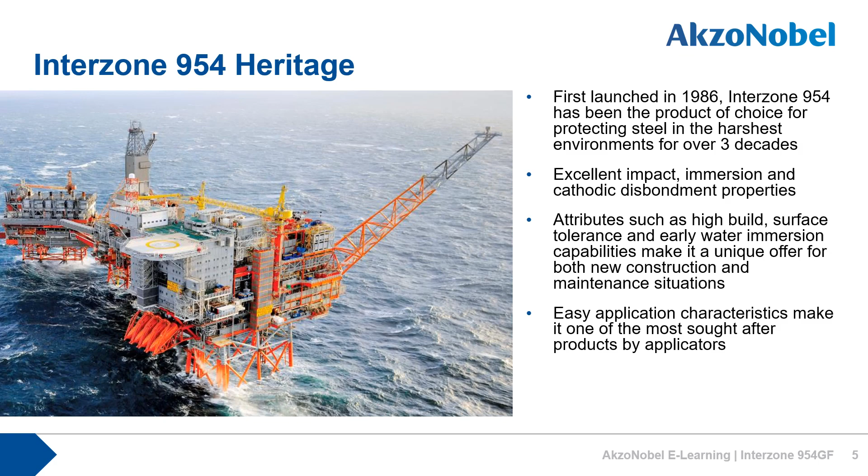Given that it is so well liked by both applicators as well as owners, it is little surprise that it's been one of the most widely used products across all our market segments. And to date, we have over 85 million square meters of steel which have been protected using Interzone 954, which is by far the most of any heavy duty product in the protective coatings world.

A key challenge for us in upgrading our heavy duty product offer was then to introduce a glass flake epoxy which retained all these characteristics of Interzone 954 that customers love, with an additional enhancement of the right loading of glass flake pigmentation to provide improved performance. And that's what we've tried to do with Interzone 954GF. So as you may have guessed by the name, it retains the basic formulation backbone of Interzone 954 and all of the great application properties and excellent corrosion performance of the original product.

A question that some of you might be asking yourselves now is, if the original product performed so well, then why do we need a glass flake version at all? And that's what I'll try to answer in this section. So to answer that question, I'll take a couple of minutes to talk about how glass flake pigmentation works. Glass is an inert material, by which I mean it does not react or dissolve with any of the harmful chemicals that we commonly come across in our industry.

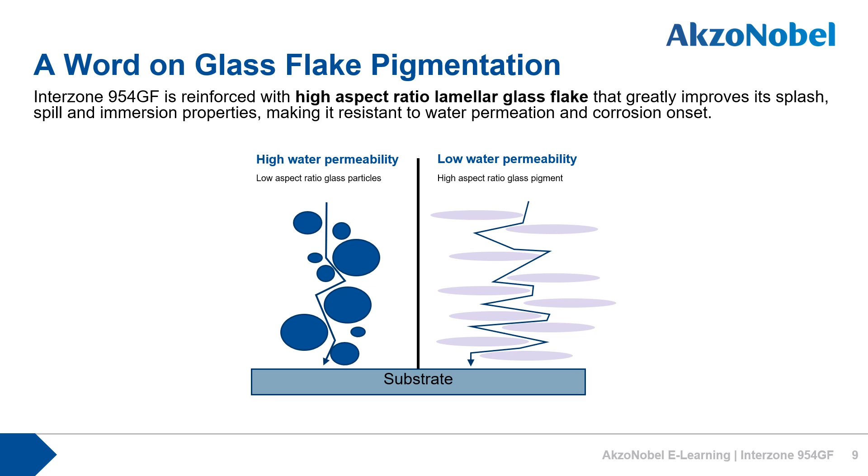We see several products on the market that claim to be glass flake epoxies, which have less than 3% glass flake pigmentation. At those low levels, they really don't make any difference to the performance of the product. On the other hand, if you go too high, then you lose out on the application properties of the product, as there isn't enough resin to be able to flow out and wet the substrate well.

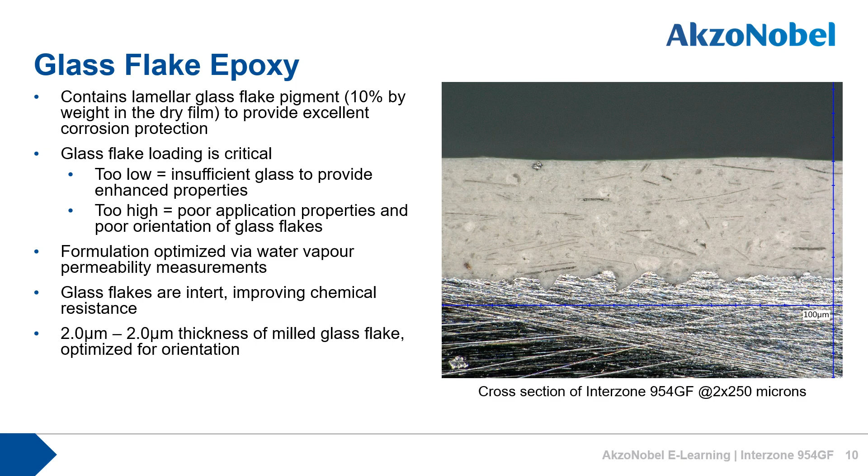A final point I'd like to highlight on this slide is that the thickness of the glass flakes is about 2 to 2.5 microns, which we found gives us the optimal results in terms of parallel orientation of the flakes. As a result, we've got Interzone 954GF, which provides all the great application properties that our customers love about Interzone 954 with the enhanced corrosion protection that the glass flake brings with it.

In this section, we will take a closer look at the features and benefits of the product. This slide gives you a snapshot of the features and benefits of the product. First, which we've already discussed, it's based on the Interzone 954 technology platform, and that brings with it decades of proven performance and application properties.

We've just discussed the lamellar glass flake pigmentation, and that gives us confidence in the long-term corrosion performance of the product, which has been borne out by the fact that it performs extremely well in accelerated corrosion tests. We haven't discussed yet that the direct to metal application properties of Interzone 954GF are excellent. So we get well over 10 MPa in adhesion values direct to steel.

It is tolerant of poorly prepared substrates such as power tool cleaning, hydrojetting, etc. It can also adhere well to existing aged coatings, which makes it a very good maintenance product as well. And that is a benefit because it reduces the need for primers, which increases productivity both in new construction as well as in maintenance, which at the end of the day reduces cost to our customers.

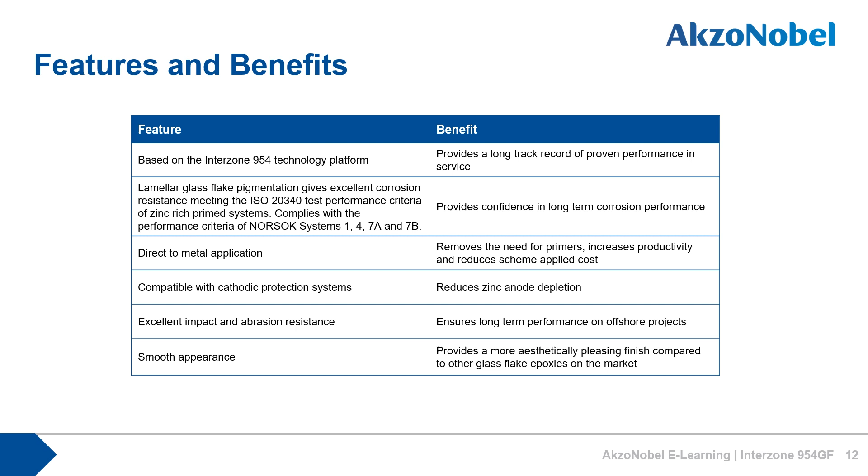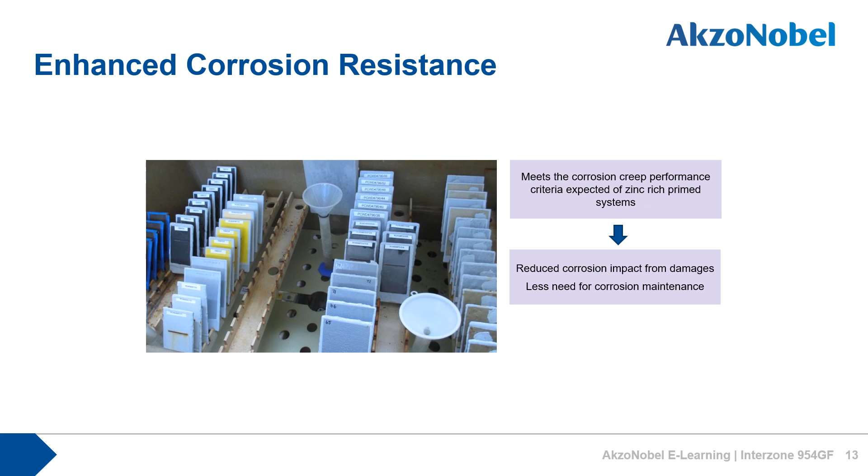We've discussed previously the enhanced corrosion resistance that glass flake pigmentation provides. This has been borne out by the fact that Interzone 954GF has shown exceptional results in accelerated tests. In fact, in the pre-qualification tests for NORSOK, it performs to a level that meets the criteria expected of zinc-rich primed systems, which gives us the confidence that it can provide very long-term durability in the harshest of environments.

On this slide, we can see how some of the application properties of the product save our customers time and money. We've already talked about the excellent application characteristics of the product, but here I will concentrate on three aspects of that. First, the product has excellent direct to metal application properties, both in new construction and maintenance, which is unusual for a glass flake epoxy.

Second, it has fast cure and low temperature cure down to -5 degrees C or 23 Fahrenheit, which can be very useful in cold weather conditions. And third, it has a wide overcoating window, both minimum overcoating as well as maximum overcoating, as well as good compatibility with a range of top coats.

The chart on the left of the screen, which has a blue background, shows the applied cost per square meter of an Interzone 954GF system compared with what we term as a traditional glass flake system, which is one that doesn't have great application properties that we discussed and usually needs to be primed with a typical primer like a zinc-rich primer or in some cases an epoxy primer. As you can see, the elimination of a need for a primer reduces material cost by about 20% when using the Interzone 954GF system without any detriment to performance.

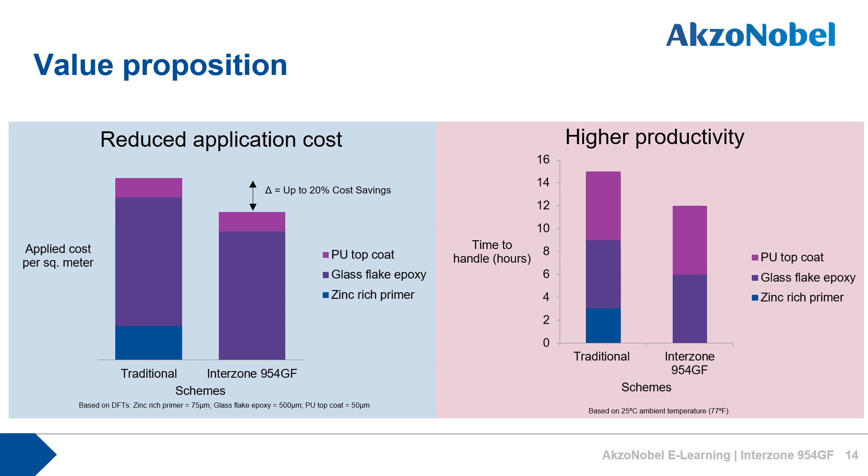As previously discussed, we believe that the selection of a 10% glass flake pigmentation level has resulted in a product that is just as easy to apply as the original Interzone 954. Spray tests in our labs as well as in customer shops have confirmed that this is the case, and Interzone 954GF is easy to spray out, quite uniform, and gives us a smooth and glossy appearance after cure.

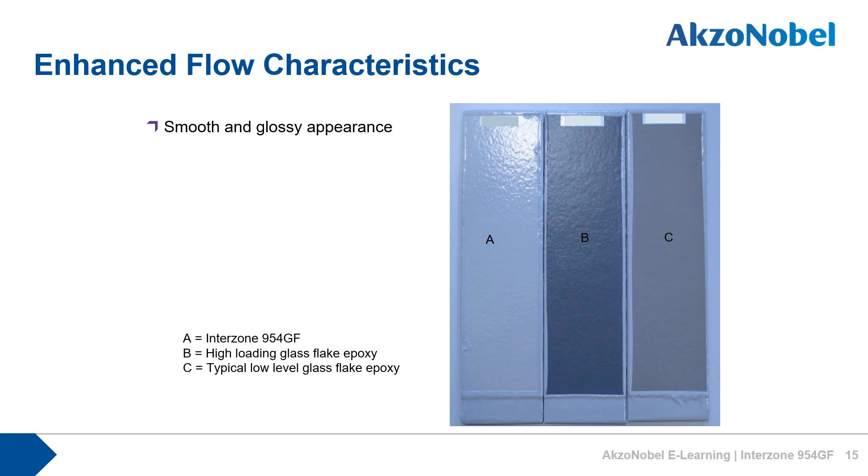So just to reiterate, Interzone 954GF is a glass flake epoxy for customers who are looking for enhanced corrosion protection with all of the great application benefits of the original Interzone 954. We've discussed in detail how the glass flake pigmentation has provided enhanced corrosion resistance properties, including abrasion, impact, and permeation resistance. We've also discussed how the great application properties and surface tolerance properties can benefit our customers. We believe this makes Interzone 954GF the perfect choice for protecting assets in a wide range of industries in both new construction as well as maintenance scenarios.

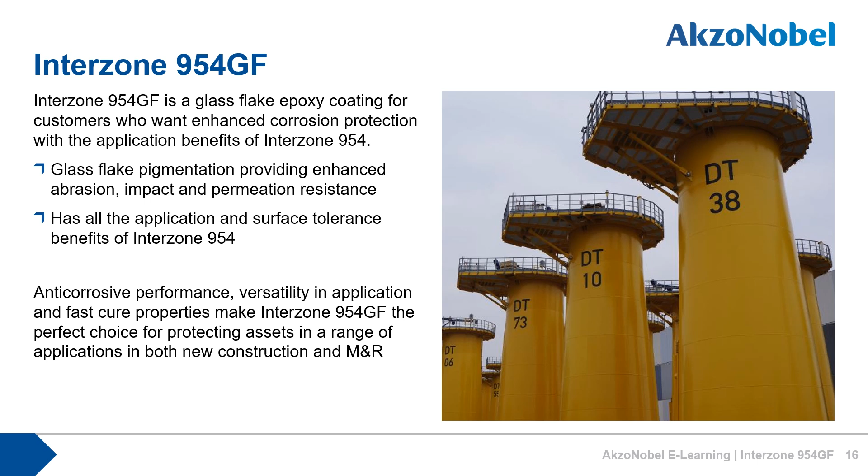In this section, we will delve a little deeper into the test data that we have for the product, as well as look at a few examples in diverse applications where Interzone 954GF has been used. So first, to the test data, the technical confidence in the product has been built through extensive testing, both in-house as well as at third-party laboratories. One of the key tests that we've used is the cyclic corrosion test as per ISO 12944 Part 9, which was previously known as ISO 20340.

We at AkzoNobel believe cyclic corrosion testing is more representative of real-world exposure than static corrosion tests. Each cycle of the ISO 12944 involves 3 days of UV condensation exposure, followed by 3 days of salt spray as per ISO 9227, followed by a day at low temperature exposure at minus 20 degrees C. And that's the figure that you see at the bottom of the screen. For offshore end users, this cycle is repeated 25 times or 25 weeks.

And as we can see on the table on the right, those are the requirements for a system to pass the ISO 12944 test regime. So less than 3 mm corrosion creep for zinc-rich primed systems and less than 8 mm corrosion creep for epoxy systems, and no blistering, no rusting, no cracking, and an adhesion value of greater than 5 MPa pull-off adhesion and less than 50% reduction of adhesion from prior to test to after aging.

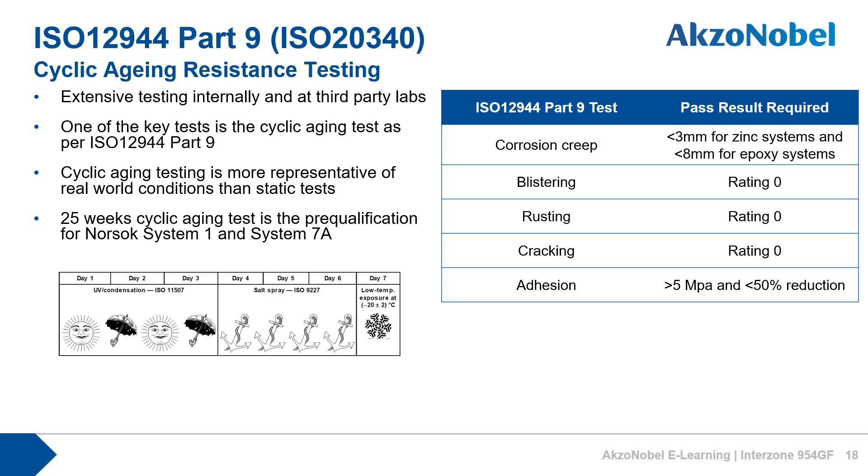The panels that you see on screen, the one on the left is with the adhesion results prior to testing or prior to aging, and the other 3 panels show the results after the 25 weeks aging. As you can see, the pull-off adhesion values are very good and virtually unchanged after 25 weeks aging, which shows that the film hasn't weakened after going through the entire 25 cycles of the ISO 12944 test.

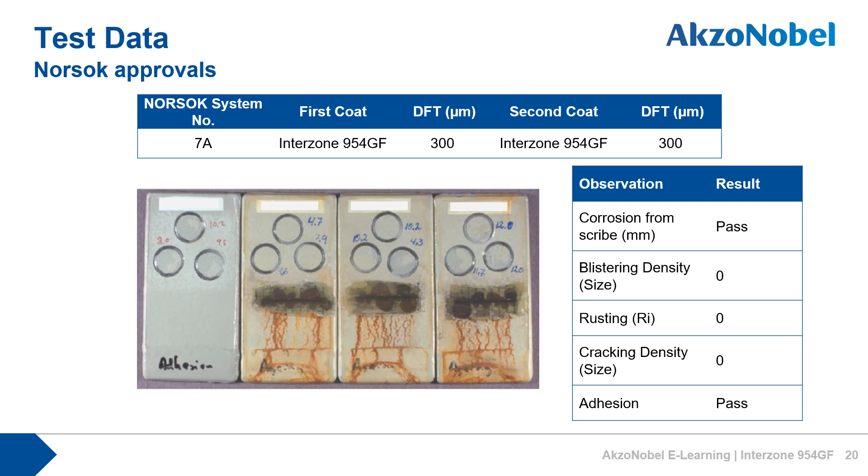Here are some panels that were put through the cathodic disbondment test. Again, Interzone 954GF has shown extremely good performance with zero disbondment. This is an important test to prove compatibility with cathodic protection, which is often required in immersion conditions.

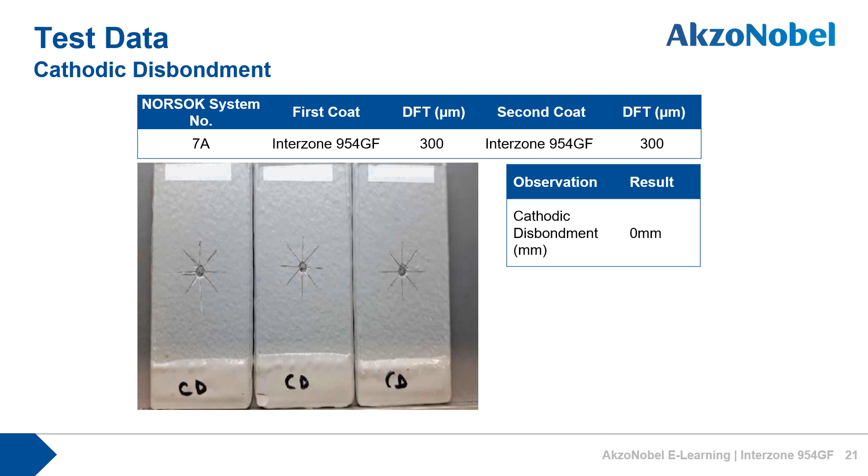This slide summarizes the third-party testing that we have for Interzone 954GF. As you can see from the table, we have approvals for all the key NORSOK systems.

System 1 for atmospheric exposure, System 4 for decks, System 7A for splash zones, and System 7B for immersion. The System 1 and System 7A schemes have performed to a level expected of zinc-rich primed systems, which is to say with less than 3 mm corrosion creep from the scribe in the cyclic aging test.

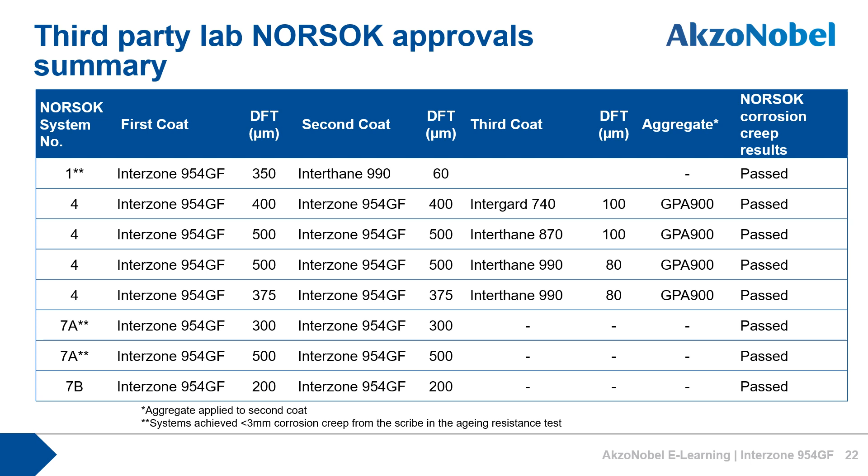A key part of the technical confidence that we build in products is to correlate the accelerated corrosion testing to natural weathering exposure in climates that mimic real-world exposures.

In addition to the coastal exposure sites, we also have panels of Interzone 954GF on exposure on an offshore buoy, which we monitor every 6 months or so, as well as on a cliff face exposure site, which mimics splash zone conditions. All of the results from these exposure sites do show that Interzone 954GF performs as well as can be expected from a high build glass flake epoxy product.

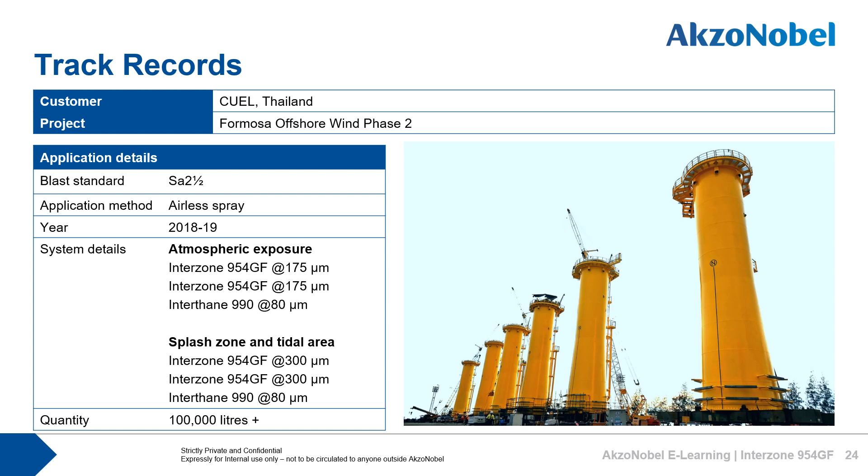It's an offshore wind project where Interzone 954GF has been used on both the atmospheric as well as immersion areas of the offshore wind turbines and foundations. As you can see in the table here, more than 100,000 liters of the product has been used. So a very large scale application for an offshore wind farm.

The next one is from the mining industry in Australia, and this is an example of use as an internal tank lining for a slurry tank. As you can imagine, a slurry tank is one of the most aggressive environments in terms of abrasion.

Interzone 954GF was chosen because of its excellent abrasion resistance properties, as well as its high build capability. That allows a very thick coat to be applied on with relatively few coats.

As mentioned here on this slide, the applicator was very pleased with the product's application characteristics, and it's a real compliment when they say that it applies as well as Interzone 954.

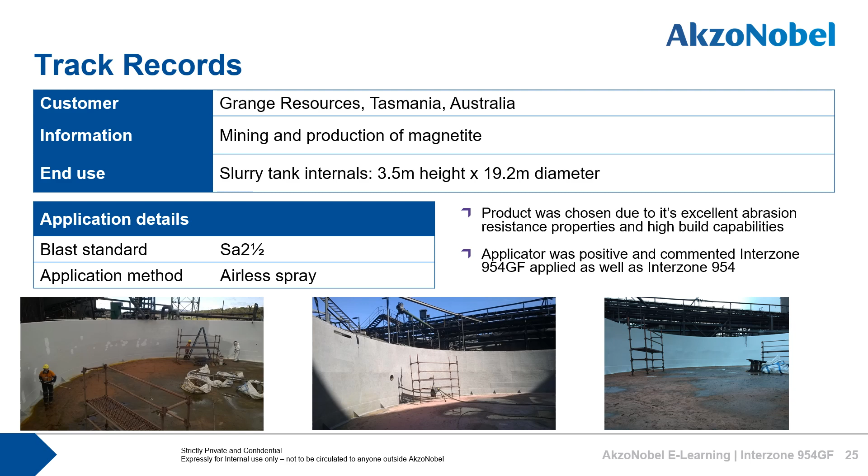The final example that we have from a track record is again from the mining industry in Australia. This is an example of where it was used in a maintenance situation for a stacker boom. Again, a very abrasive area where iron pellets flow over the stacker boom when loading iron ore onto transport vessels.

Interzone 954GF was once again chosen because of its excellent abrasion and impact resistance characteristics, as well as its application friendliness in maintenance situations.

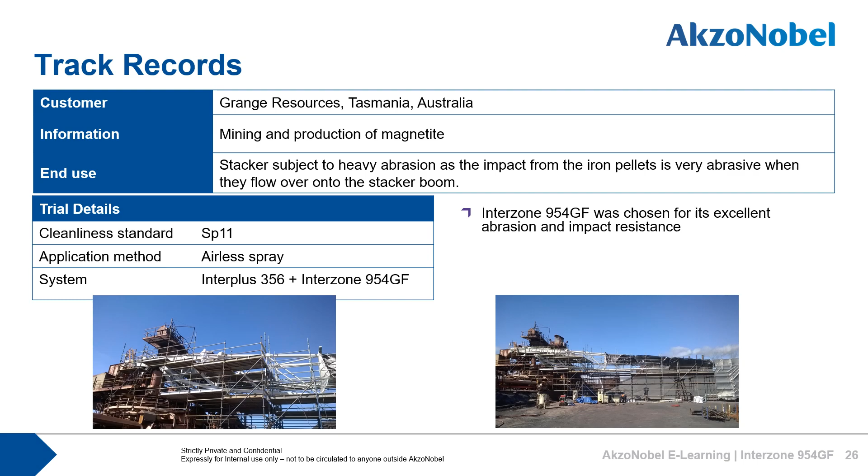We're coming towards the end of this webinar now, and we'll finish with a quick summary of what we've covered today.

So Interzone 954GF is a glass flake epoxy, and it is based on the proven technology of Interzone 954. Its excellent corrosion performance has been borne out in laboratory tests, as well as natural weathering exposure, as well as with in-field performance from the applications that we've had so far.

The direct to metal application properties are great for both new construction and maintenance situations. And the increased time to first maintenance is due to the excellent corrosion performance, as well as the excellent impact and abrasion resistance that the product has.

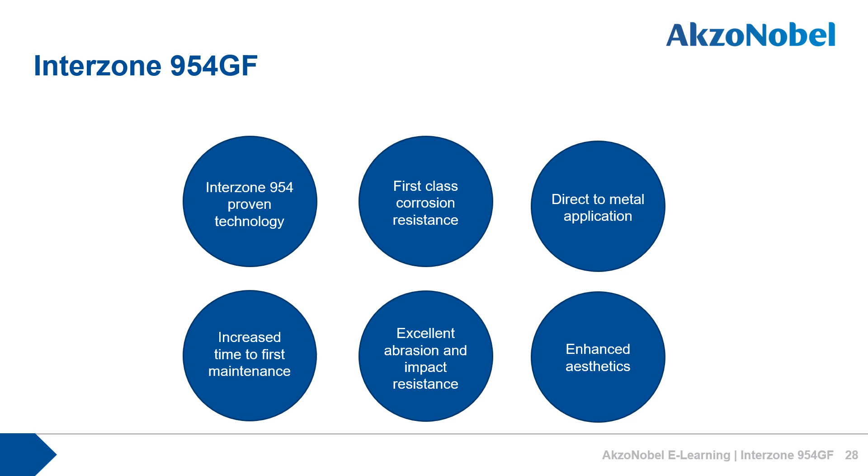It does have very good aesthetics and is pretty much indistinguishable from Interzone 954 when applied, which is to say it looks very good. And in summary, we believe that Interzone 954GF is probably the best glass flake epoxy that you can find on the market and does save customers a lot of time and money.